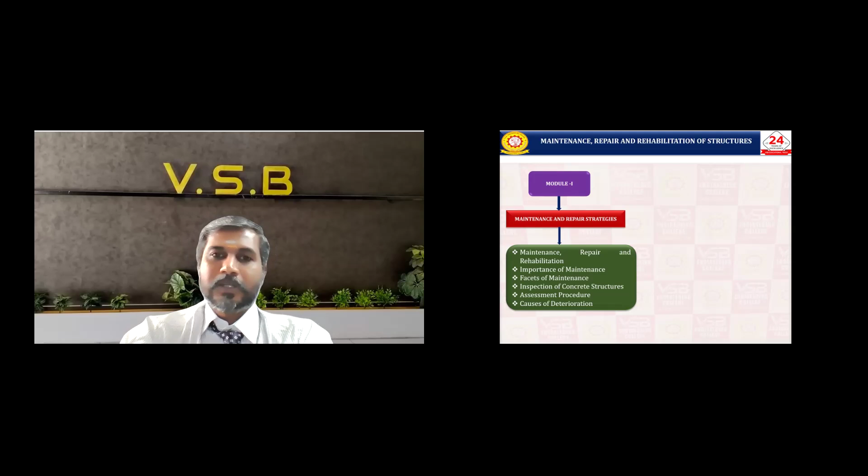A quick recap of module 1: we discussed maintenance and repair strategies, the basic fundamental definitions of maintenance, repair and rehabilitation of structures, the importance of maintenance, facets of maintenance, and inspection of various concrete structures, along with various assessment procedures to assess existing concrete surfaces and the causes of deterioration of structures and how to prevent such deterioration. Everything was discussed in module 1.

Now we are going to discuss module 2, serviceability and durability of concrete. Here we will elaborately discuss the quality assurance of concrete, which we can maintain before concreting, during concreting, and after concreting. So three stages are important to maintain the quality of concrete.

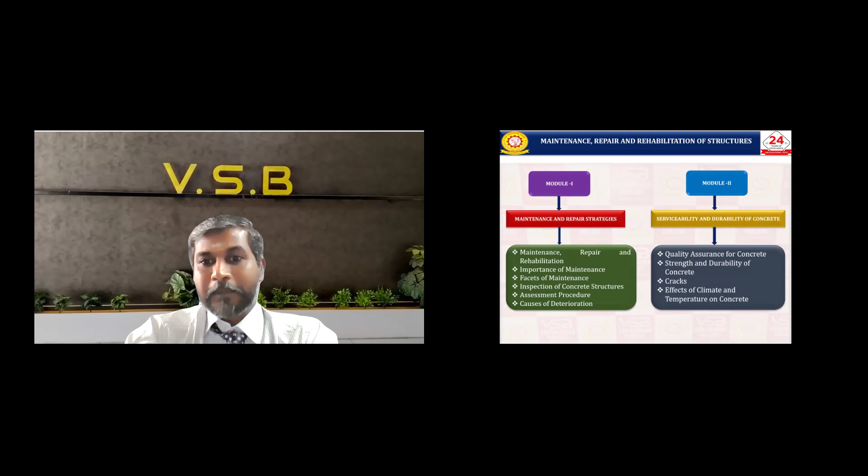After that, we will discuss the strength and durability of concrete, how cracks form, and how we can repair various types of cracks. Finally, we will discuss the effect of climate and temperature on concrete, which we will cover in detail in module 2.

What is our module 2 objective? The first prime objective is for learners to understand the serviceability and durability of concrete structures. Serviceability indicates comfort of people, safety of people, and proper functioning of concrete structures. Durability indicates long life of the structure and resistance to damage.

So how do we preserve serviceability and durability? We need to maintain proper maintenance, meaning no excess cracks, deflection, or water leakages. While talking about durability, we can achieve resistance to weather, moisture, and chemicals. These come under objective 1 of module 2.

Objective 2 of module 2: learners should apply quality practices to achieve concrete strength and durability. How do we achieve the quality of concrete? We need to maintain three stages: pre-construction stages, during construction stages, and post-construction stages.

We need proper standard procedures to achieve quality assurance. For example, we need to maintain proper quality of mix design, and select high quality materials. Here material indicates that for making concrete, cement is one of the prime binding materials, along with fine aggregate and coarse aggregate.

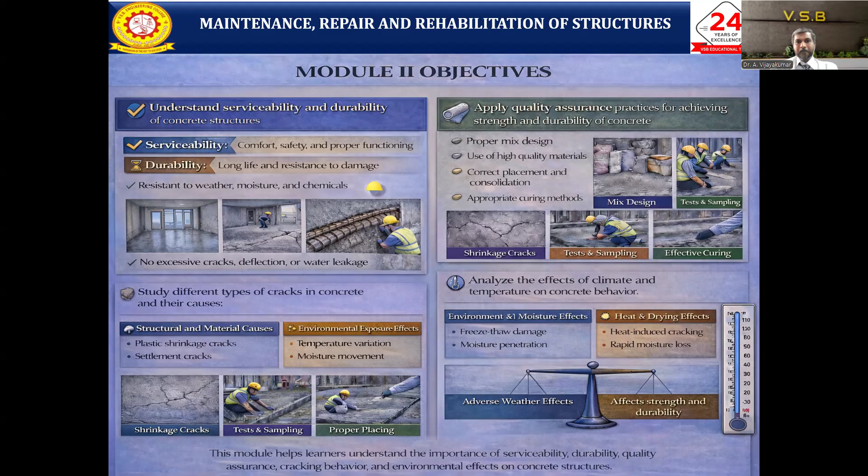So the first topic is quality assurance of concrete. Quality assurance is achieved through a systematic process. What is this systematic process? To achieve the quality of concrete, we need to maintain pre-concreting, during concreting, and post-concreting. These three systematic processes we need to maintain from the starting onwards.

Selection of material - that's why we discussed earlier in objectives that we need to select good quality materials, and workmanship - the people who are working at the concrete stages - and the construction must meet the required standards. So this quality assurance involves various testing.

Testing means what? When you make concrete, we use different types of materials - fine aggregate, coarse aggregate, and cement. Everything needs to be tested properly. Some examples shown in the picture: the slump cone test is very important for concrete, and cube testing is also important for the concrete section.

Then various inspections during the concrete process, and monitoring during production, mixing, placement, and curing. These are involved during the concrete processes to maintain the quality assurance of concrete.

So when looking at the sequence, what is it? We need to do proper material inspection - coarse aggregate, fine aggregate, cement. Sometimes we mix in admixtures also, which also needs proper inspection.

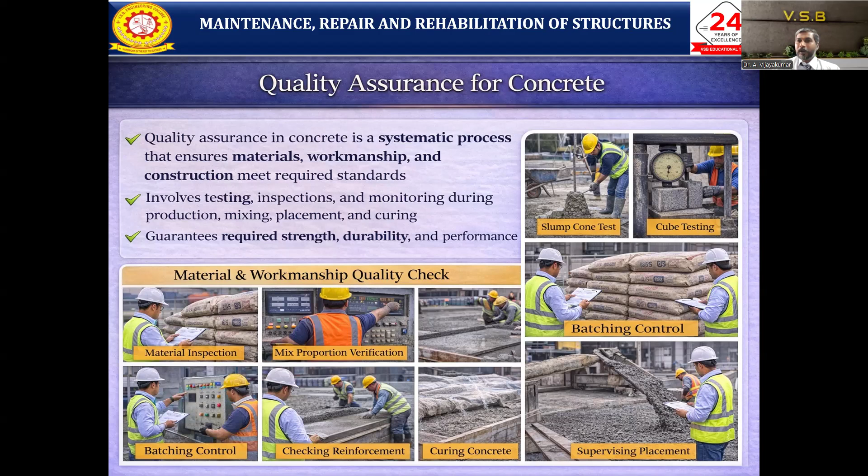What is our final aim, our ultimate aim? We need to monitor, we need a systematic process to follow to achieve the quality assurance of the concrete structure. Once you maintain pre-concreting, during concreting and post-concreting, we will get the guaranteed required strength - what we are aiming for, what we are dreaming of. The durability and performance, everything we can achieve once we maintain proper quality assurance of our concrete surfaces.

So this is the sequence of methods we follow for quality assurance of concrete. What are the three stages? One is pre-construction stages, second is during-construction stages, and third is post-construction stages.

First, the pre-construction stage to ensure high quality of the material and proper mix design, which we need to follow to maintain the quality assurance of the concrete. When selecting material, whether aggregate, fine aggregate, coarse aggregate, admixtures or cement, quality should not be compromised as a civil engineer. We need to select proper high quality material for our concrete.

Whatever the mix design, when doing trial mixes, we need to follow the correct methodology, whether it's M30, M40, or M45 concrete.

Before starting, we need to test all the materials. Aggregate testing will be there: flakiness test, impact testing, abrasion test, elongation test. These aggregate tests will be sieve analysis. All these tests we need to calculate. Then for cement, we need initial setting and final setting, fineness, modulus and soundness - everything we need to test before proceeding.

Whatever mix design comes, we need to follow trial mix assessment based on workability and strength. So we need to monitor proper water cement ratio control, mix proportioning and adjustment, and lab testing analysis for the trial mixes decided for the site - everything we need to achieve in the lab results. Before going to concrete, we need to assess and give assurance, get the standard value. That is what we need to maintain to achieve quality assurance before concreting itself.

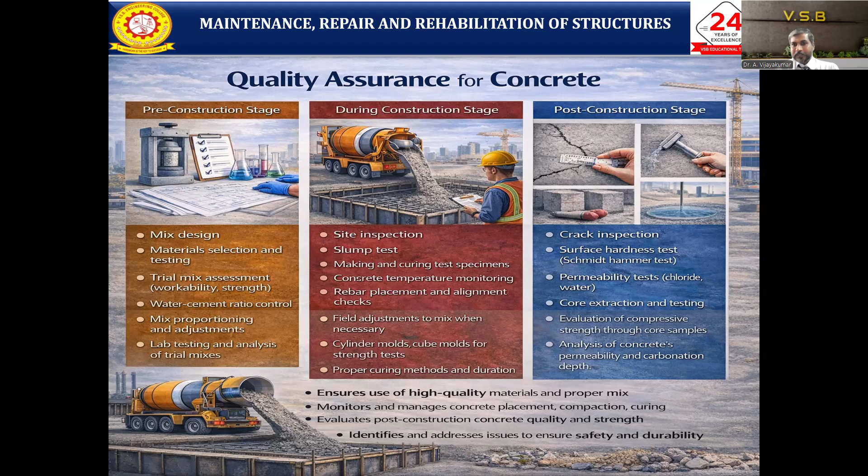So this topic is important for our concrete structures. Next topic: strength and durability of concrete.

What is the indication for strength of concrete? Our concrete member, our building member - the main prime aim is to resist forces, whether dead load, live load, or lateral load, whatever load it is. Our concrete structure must resist without breaking and without deforming - that is called strength.

So the main strength of concrete focuses on its ability to withstand loads and stresses. We find out the strength of concrete based on the compressive test, tensile strength, and flexural strength.

These are the key tests available to check the strength of concrete. These three tests have different influencing factors. One is the water cement ratio - when water added increases, strength automatically reduces, and vice versa.

Then curing time - if you have good curing, you get more strength and durability increases. If not properly cured, strength will be reduced and durability also decreases. Then admixtures - these are a few factors influencing the strength of concrete.

Coming to durability - as a building or structure, concrete will resist deterioration against so many forces or causes. Our building should not deteriorate and should maintain desired properties over time. When you start construction, you have desired properties of concrete that you need to maintain over the whole lifespan of the structure - that is durability.

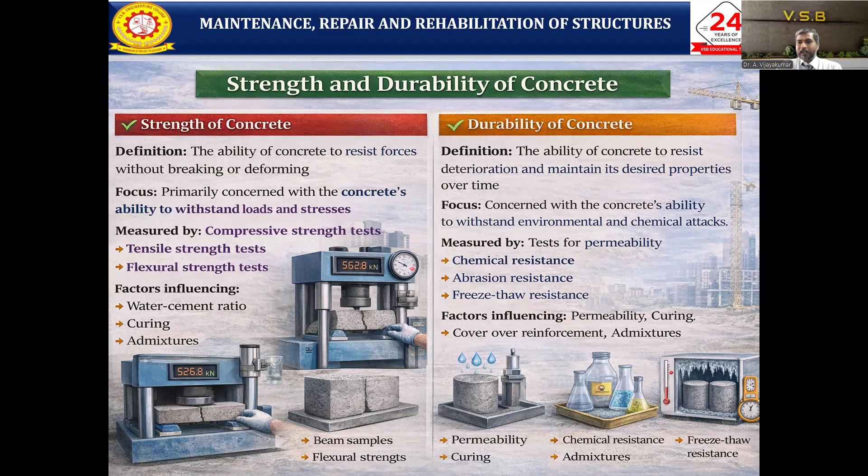So these are the pictures. We can do permeability tests, chemical tests, and freezing-thawing resistance tests - everything to measure the durability of concrete.

So first we are going to discover the key points of the strength properties. Strength is achieved through three methods: one is the compression testing method, and another is tensile strength.

Normally concrete is very good in compression but very weak in tension. Directly we cannot measure the tension, that's why we do the split cylinder test. Direct tension is quite difficult, that's why we make a cylinder and use the UTM to conduct a split cylinder test.

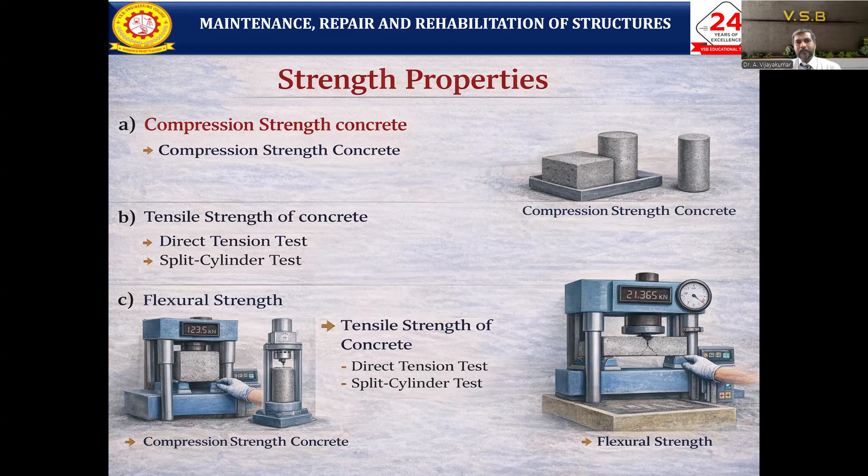And finally, flexural strength. So these are the three methods available to assess the strength of concrete structures.

When selecting the specimen, we need to make the desired trial mix, maybe M15, M50, or M20 concrete, whatever the concrete may be. For the selection of the concrete, we pour it in three layers.

Each layer we need to compact using the tamping rod, minimum 35 strokes, done properly. Then only we can reduce the voids and honeycombing formation. So we need to do proper compaction.

Once the concrete is poured, the next day we need to remove the mold, then keep it in the water tank for curing as test specimens.

Once poured in the water, we need to cure for a minimum of 7, 14, or 28 days. Once it's over 7, 14, or 28 days, we take it from the curing tank and keep it at normal room temperature, just outside, so the atmosphere moisture will spread out.

After that, we place it in the UTM, the universal testing machine, or compression testing machine. We start applying the load gradually until a crack occurs. We place the cube or cylinder in the compression testing machine.

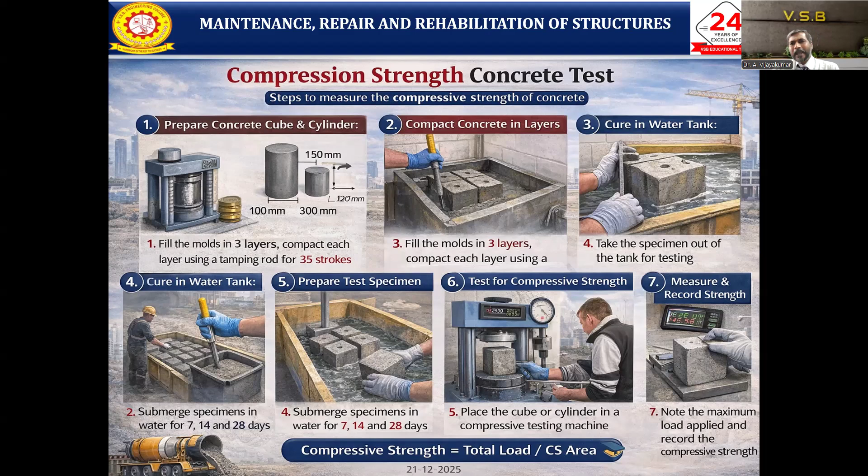Otherwise, if I'm making a trial mix of M30 or M40 concrete, we need to follow the same standard procedure and conduct the test. Our value should not be less than 30 Newton per mm square or 40 Newton per mm square. Then only we can achieve the proper composition. This is one of the prime methods to assess the strength of concrete using cubes and cylinders.

Next, coming to the split tensile test. Earlier we mentioned that concrete is very good in compression and very weak in tension. There's no need to measure tension normally, but concrete will take a little bit of tension.

So we have two methods to find out the tension: one is the direct method and the other is the indirect method. The direct method is not possible, it's quite uncomfortable and difficult to measure tensile stress. So we follow one more method, the split cylindrical test.

For this, we need to select a proper standard size cylinder, minimum 50 mm diameter, same as followed in compression testing. We need to pour the concrete in layers, give 35 strokes with the tamping rod, compact it properly, then cure it properly.

They need to remove the mold and keep it in the tank. Same like that, we need 7 or 14 or 28 days of curing. After that, we need to take the mold out from the specimen and keep it in the room atmosphere. Then we need to keep the test specimen in our compression testing machine.

Testing is in the horizontal layer. Then we need to gradually apply load. The test should focus on splitting the cylinder into two halves. Then only we can achieve our proper indirect split tensile tension, so we determine the tensile strength of the concrete.

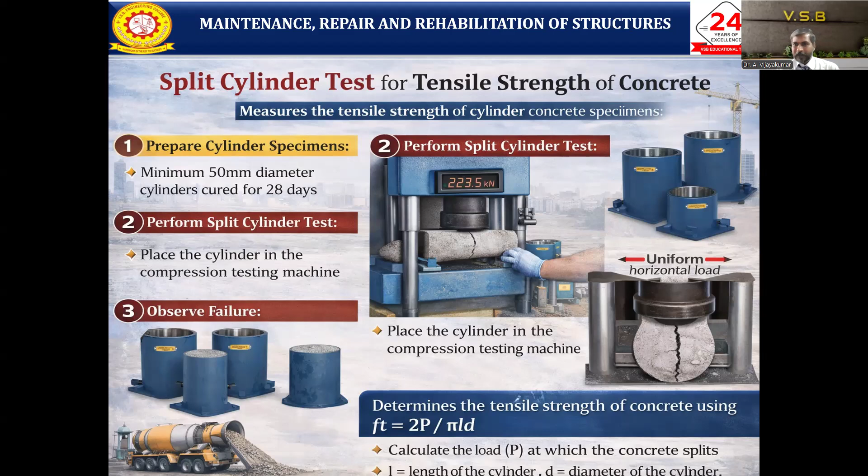There is the formula 2P divided by pi into L into D. P equals the force we applied, L equals length of the cylinder, and D equals diameter. So using this formula, we can find out the split tensile strength of the given concrete. So the third test is flexural.

It's like a beam. Beam is a flexural member, testing concrete strength. As usual, we need to select for the flexural test specimen a size of 150 by 150 mm by 700 mm, having different specimens. Following this test procedure, we need to make the concrete.

We need to compact properly using three layers. We need to cure mainly for 28 days, normally we need to keep it. After that, we need to keep it in the compression testing machine.

The testing method changes, the support condition changes, that means a 2-point loading. We place the beam in the machine under symmetrical 2-point loading. Then we need to apply the load gradually and properly.

Then we need to observe where the cracks form. The cracks form from the bottom - that is a flexural crack. Since it is simply supported, when you apply the load, definitely the crack will occur at the bottom, a flexural crack. Then it will subsequently fail at the top also, in a nearly vertical manner.

The crack will come. So using the modulus of rupture, M by Z, where Z is the section modulus and M is the moment, we can find FR. So calculate the load at which concrete breaks and cracks form - this is called the flexural concrete strength.

So using these three methods, we can assess the strength of the concrete: one is compression test, tensile test, and flexural concrete test. Using these three tests on a given concrete, we can assess its strength. This is called the destructive technique.

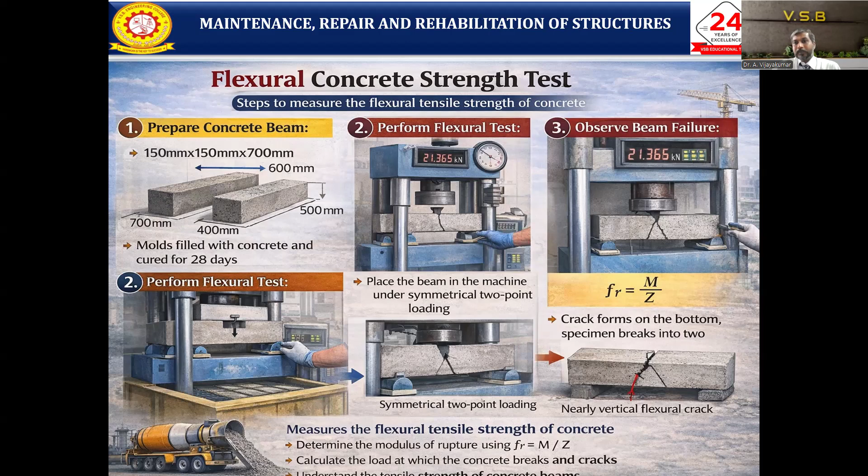So one more method is available: non-destructive. We should not break the materials. This NDT we are going to discuss later - how we determine the strength of the concrete without deterioration, without breaking the concrete structure.

Coming to the durability of the concrete, what is the pure definition? Our member structure is the concrete's ability to resist deterioration and maintain the desired properties over time. What I initially assumed as the properties, we need to maintain over the period of the lifespan of the structure.

That means ability to withstand the environment - our concrete structure should withstand all environmental conditions and chemical attacks. That is mainly the focus on durability.

How to measure the durability? Based on the permeability test, based on chemical resistance, based on the abrasion test, based on the freezing and thawing test - these are the tests available to measure the durability of concrete surfaces.

So here also many factors influence our durability. Permeability - of course, more permeable means durability will decrease. Curing time also - if not properly cured, durability also decreases. Cover of reinforcement - if not provided properly for the reinforcement, durability decreases. If not used properly, admixtures for the requirement process also cause durability to decrease. So these are some factors influencing the durability of concrete structures.

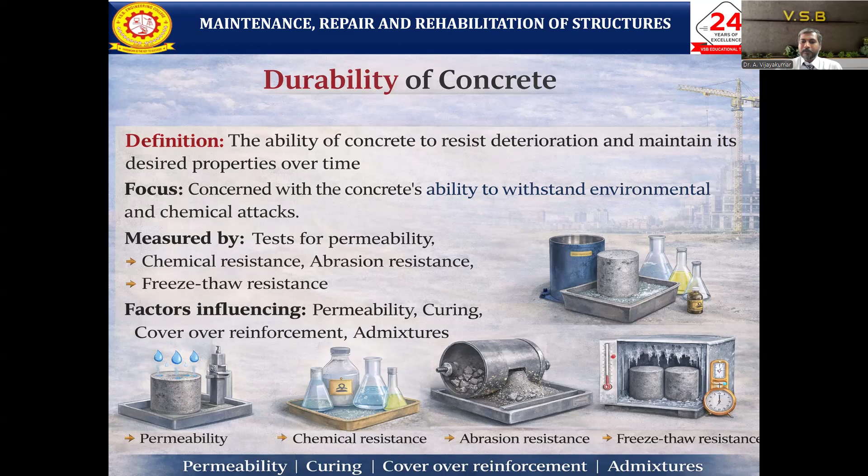The first important test is called the permeability test. Permeability is the ability of the concrete to allow water or gases to pass through it. So as a civil engineer, our ultimate aim is that our concrete member should not allow permeability. That is important. Somehow, what will happen - it will be permeable.

Automatically, water or gases pass into the concrete member, and that directly affects the durability of the concrete. Water starts to penetrate inside the concrete surfaces, and there may definitely be chances of corrosion of the rebar. High permeability means lower durability, less permeability means higher durability - it's vice versa. So corrosion of the reinforcement is caused by water and chemicals entering the concrete.

Our ultimate goal is to prevent water penetration into the concrete surfaces. When moisture, water, or gases penetrate the concrete surface, it automatically touches the rebar, which causes corrosion. Some structures are called lifeline structures - dams, nuclear power plants. For these structures we should not compromise the quality of concrete; they should not be permeable, they should be impermeable, and we should not allow even small hairline cracks.

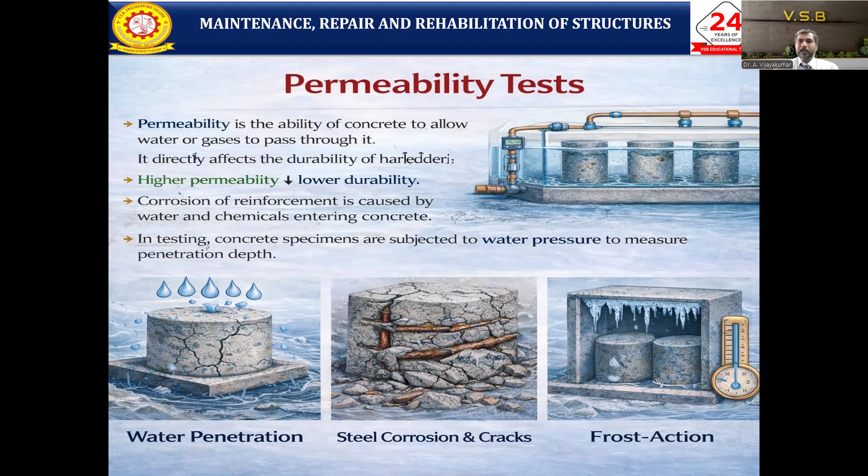In other cases, in a cold climate - minus 20 degrees or 10 degrees Celsius - if there's a gap and water has penetrated, it will freeze. Continuous freezing and thawing, continuous freezing and thawing, also creates chances of failure in concrete. So this is one of the prime methods to assess the durability of concrete, using the permeability test.

So through the cracks, water starts to penetrate inside. After some time, the reinforcement below - in the beam too - everything starts to get rusted. Over a period of time, severe deterioration happens to the entire concrete surface, and once severe deterioration occurs, it's very difficult to repair. So our ultimate aim, when we see permeability issues, is to arrest it immediately - this is very important for the permeability of our concrete structures.

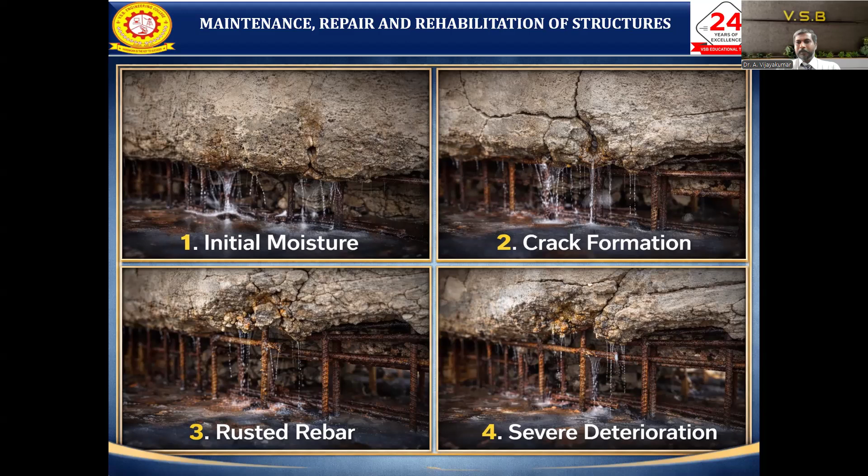So the next one is the freezing and thawing test. This is only applicable where temperatures reach minus 10 or 15 degrees Celsius. Freezing and thawing resistance evaluates the material's durability against repeating freeze-thaw cycles commonly experienced in cold climates.

Just imagine it's the month of December, and the climate has turned cold. During the evening or midnight, the winter sets in more, with mist appearing. The nature of water also changes - during the daytime water behaves differently, and during the nighttime water is a bit different.

Just imagine below 10 or 20 degrees Celsius, what will happen? It will be freezing and thawing continuously. This is more applicable for cold climates. Imagine our concrete member has small cracks. Through those cracks, water starts to penetrate inside. Sometimes in cold climate, it will freeze.

The water that enters into the crack will freeze. Once the climate changes, this frozen water starts thawing. The cycle repeats more than 300 or 400 times, freezing and thawing continuously. So the cracks also start to widen. That is called the tensile crack, which occurs in our concrete members.

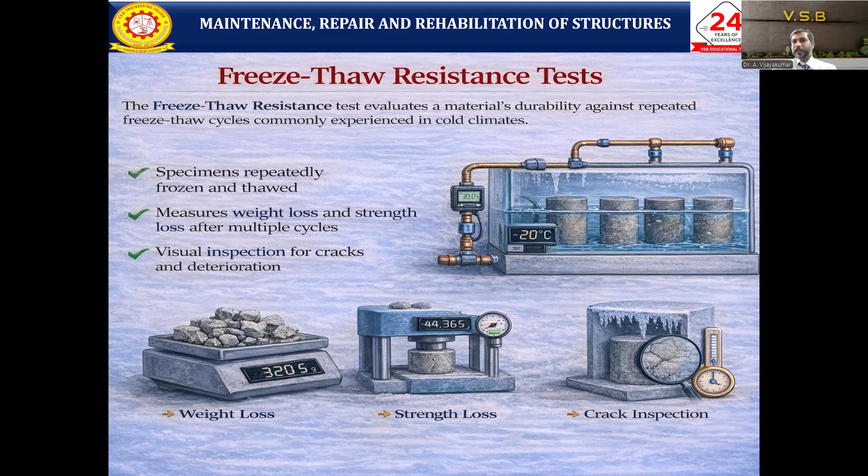This is a practical example: when you see concrete surfaces, for some reason the concrete starts to develop a crack. Through the crack, water starts to penetrate into the pores. Once the water penetrates, it starts freezing because the climate is cold. Then as the climate warms, thawing happens. This continuously occurs, and when freezing and thawing keep happening continuously, what happens?

Expansion keeps increasing. Internal tension is created in the concrete members, causing internal tension cracks. The surface also develops tension micro-cracking. This micro-cracking has chances to widen, and through this widening, water again starts to get into the micro-cracks, causing the cracking to increase further.

Once micro-cracking is produced and water penetrates, capillary swelling happens - the pore pressure allows water to penetrate all the places and settle. This is a continuous effect of freezing and thawing, with minus 20 degrees Celsius for freezing and plus 5 degrees Celsius for thawing. Continuous freezing and expansion cycles definitely cause deterioration of the surface.

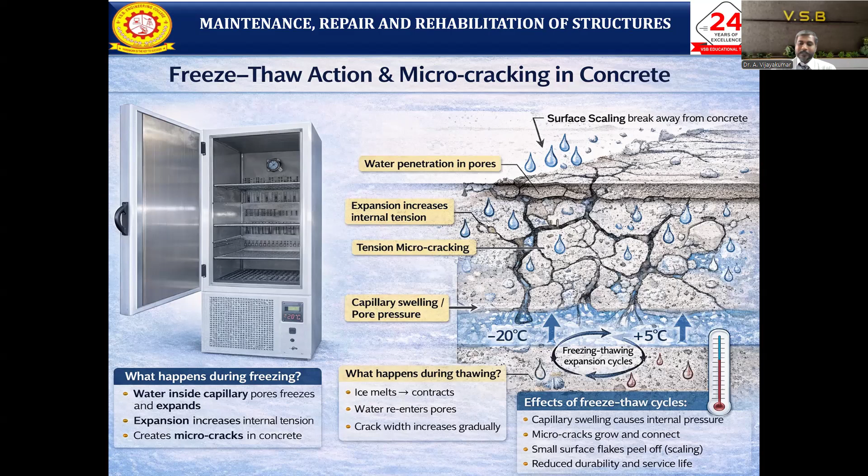Then it is very important for the alkali resistance test. Normally we evaluate the resistance of the concrete or mortar in a high pH, alkaline environment, meaning greater than pH 7, for high alkaline value. So how do we conduct the test for alkalinity? The concrete specimen is immersed in an alkaline solution with pH value greater than 7.

We need to keep it for more days immersed in the alkaline solution. What happens is it starts to penetrate inside the concrete surfaces, and a chemical reaction starts. Sometimes it goes to all the places, starting weight losses, and it goes into the bond and everything inside the material.

So weight loss will happen and strength loss will happen. Surface damage, cracks also will be there. So we need to analyze the internal changes in the concrete - it will be a chemical effect.

So where we apply this - near an industry area, if you construct a building, there may be chances of cracks. The alkaline solution or alkaline matter may get chances to penetrate into the concrete surface. That also starts the deterioration of the concrete surfaces, which also reduces the durability of our concrete surface. We need to measure the alkaline reaction for that.

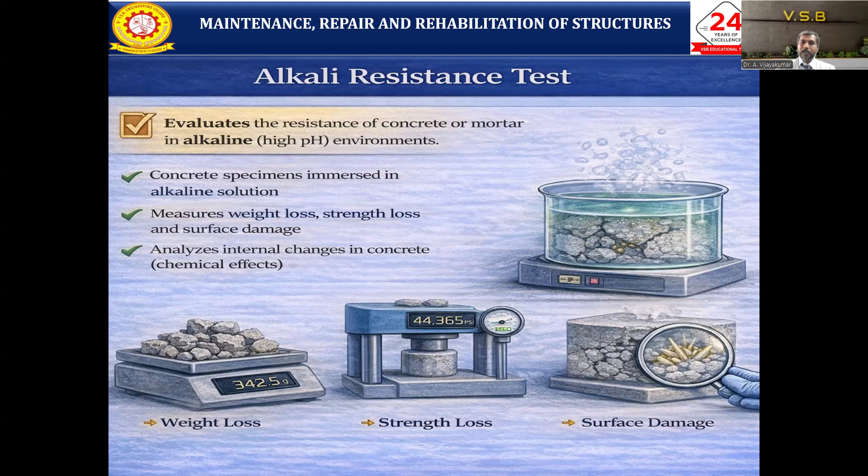Based on that, we can conclude and select the proper mixtures to use for our concrete structure to resist alkaline attack on the members. So this is a laboratory test to conduct for alkaline resistance - how does the alkaline behavior affect our concrete structure?

We have two chemical components available in the concrete surface: one is silica, the reactive silica in the aggregate, and the cement paste has alkali. So here we have two chemical components - the aggregate having silica and the cement paste having alkali - both available in the concrete surface.

If we have any micro cracking or cracking, moisture starts to penetrate and immediately chemical reactions begin. Because of this chemical reaction, the aggregate surrounding has chances of further expansive gel formation around the aggregate. With continuous water absorption, the gel thickness surrounding the aggregate starts increasing like a bulb, swelling with pressure, and then tensile cracks occur.

Internally, the expansion creates internal stresses, causing cracking in the aggregate and the surrounding concrete surfaces - the tensile crack occurs around it. Because of this, the micro cracks connect and map cracking occurs throughout the structure, so there are definitely chances of deterioration over a period of time.

So see, our building structure is an example of this. It's nearly constructed near a chemical industry, which has a pH value of more than 7 causing alkaline reaction. Because of that, maybe through water or through air, that chemical starts to penetrate into the concrete surfaces. So once it enters during moisture exposure, it starts the deterioration of the surfaces.

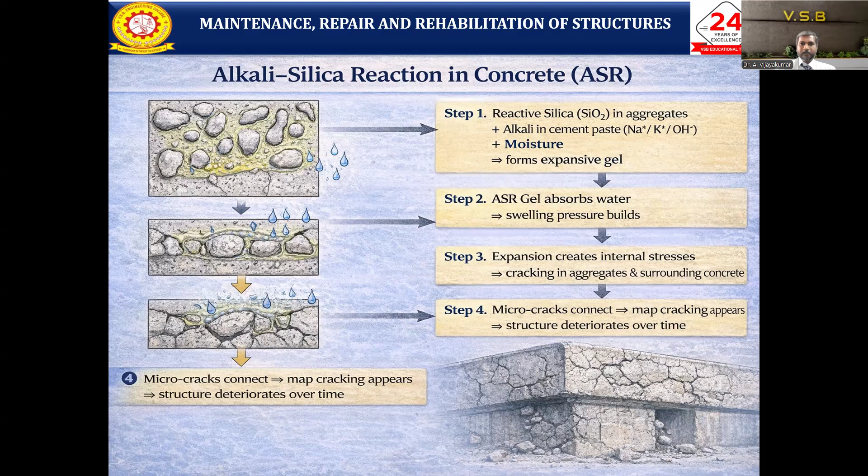Next test we are going to see is sulfate attack of the concrete, to evaluate the resistance of the concrete or mortar in a sulfate environment. The concrete specimen is immersed in a sulfate rich solution, and we check the weight losses, strength losses, and surface damages.

We use sulfate rich solution, SO4 and other chemicals for this test. Once immersed in this sulfate rich solution, there are chances of cracking, spalling and surface damage, everything is to be monitored properly.

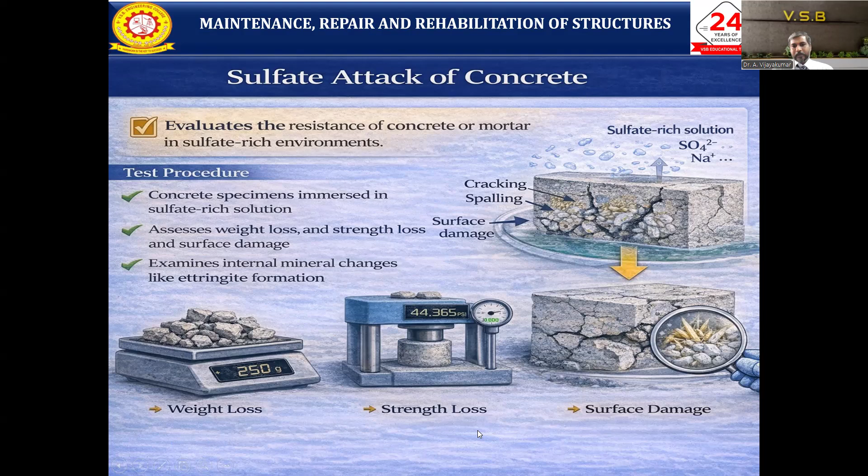What will happen once we use this solution is it will create ettringite formation. The internal mineralogical changes will happen. Once internal changes happen, that is called ettringite formation. Based on this, weight loss will be there, strength will be reduced, and surface will be damaged. This is the method for sulfate attack on concrete.

So how does it happen in real life? Sulfate attack occurs in real structures when sulfate ions react with components in the concrete, leading to expansion and damage. Sulfate is more available in the soil, and our groundwater also has more sulfate. This will mingle and contact with the concrete, then the chemical reaction will start.

So there is presence of sulfate in the soil or groundwater, and use of sulfate containing water and materials in the concrete. What happens once sulfate attack occurs in the concrete? Tensile cracks will occur, expansion and cracking will occur, surface scaling and disintegration of the concrete material will occur. So finally, strength will be reduced and durability of the concrete will also be reduced for the given concrete. This is the method for sulfate attacks.

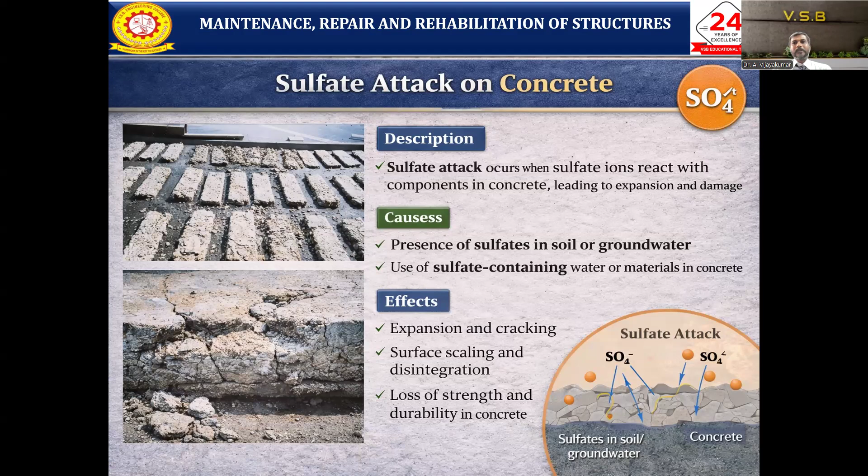So how does the reaction happen? We discussed where sulfate is available - one is groundwater, soil having groundwater. It will contact with the cement matrix. Once it contacts, ettringite will form - a new gel formation will be formed.

The sulfate attack is caused by reaction of the sulfate ions with calcium hydroxide in the concrete, forming ettringite - this new chemical reaction forms. Because of this, our concrete members start to expand and stress, cracks will be formed, micro cracks will be formed, this causes damage, and this is finally the deterioration of the concrete.

So whatever may be the things, our concrete members need to be maintained impermeable. These are the tests for the durability of the concrete.

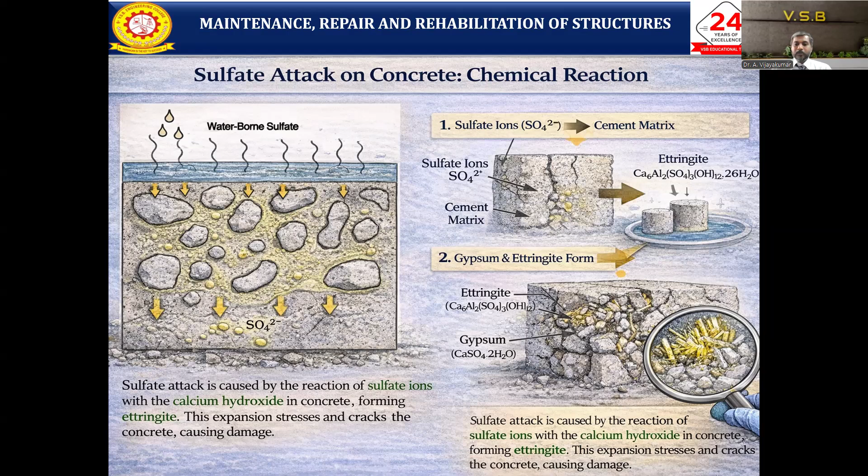So the next topic is cracks in concrete - the different types and causes of cracks. What is the definition of cracks? Cracks are a separation - they separate the structure into two parts. You can call it a fracture or a discontinuity, because earlier it was continuous, now it becomes discontinuous, and this appears in materials like concrete, masonry, or plaster.

The reasons are several - maybe physical reasons, environmental reasons, or structural factors. The main phenomenon of cracks is discontinuity of the structural member, a small separation or crack. Once a crack occurs in the concrete surface, it will definitely affect the durability of the concrete. Then the appearance and aesthetics will change in the concrete surfaces, and structural integrity will change. That is the main effect of cracks in concrete surfaces.

So what are the causes of cracks in concrete? We classify them into three types - one is structural crack and non-structural crack. That is classified into one type.

Structural cracks will be because of excess loading or overloading, which chances the structure will fail, and immediately foundation settlement or differential movement of settlement, maybe chances of chemical failure, and design flaws. Okay, not designed properly, construction changes, poor detailing, inadequate reinforcement, or seismic activities or the earthquake. These will become structural cracks.

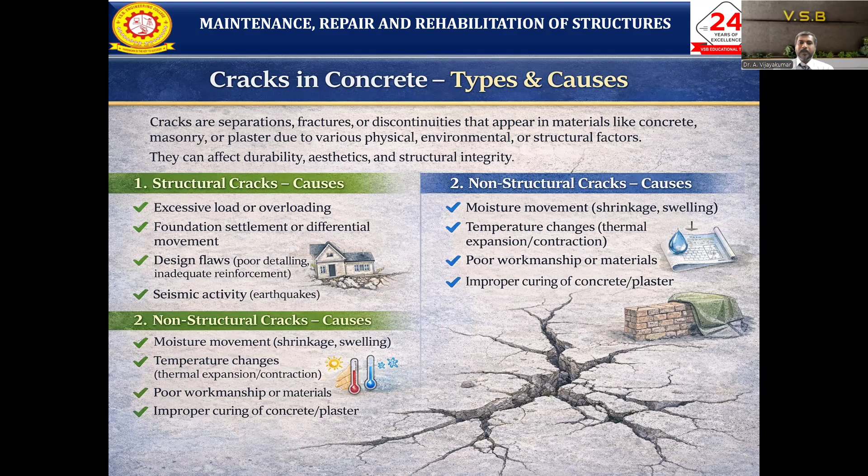Based on appearance also, we have divided different types of cracks. One is shrinkage cracks, which is divided into two: plastic shrinkage cracks and dry shrinkage cracks. Plastic shrinkage crack appears from rapid loss in the fresh concrete. Once pouring the concrete, immediately water starts to evaporate, and because of the water evaporation, crack will form. That type of crack is called plastic shrinkage crack.

So what is a dry shrinkage crack? It occurs when the concrete or mortar loses moisture and contracts over a period. It won't show immediate cracks; it takes a long time. So after hardening of the concrete, it will get some cracks - that is called dry shrinkage crack.

Because of foundation failure, the movement of soil or settlement of uneven loading, maybe chances of vertical crack or horizontal cracks in the wall or floors or roofs, whatever it may be - that is the settlement crack, mainly coming from foundation failure.

Thermal cracks caused by temperature variation leading to expansion and contraction of the material - thermal cracks will come. Currently, when reinforcement bar rusts, because somehow moisture can enter the concrete surfaces, maybe rust in the reinforcement. Because of rust, expansion will come, maybe chances of causing cracking.

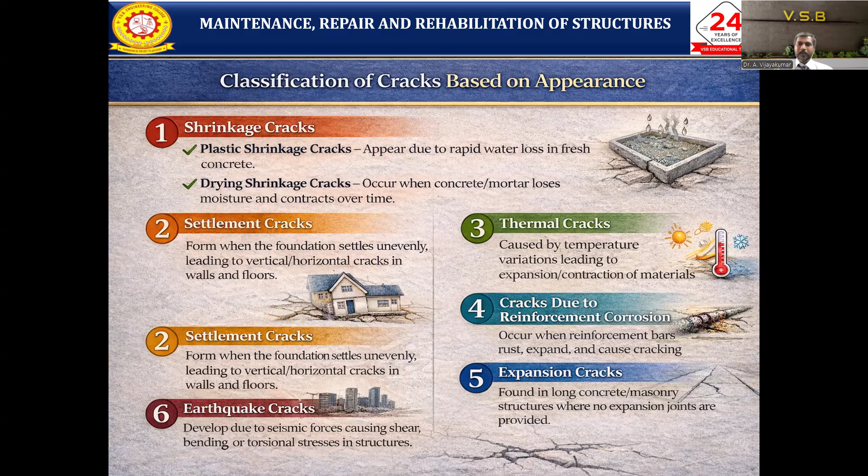What is the effect of climate and temperature on concrete? What is the cause or reason for this? Exposure to changing climate conditions, frequently changing causes happening with temperature - daily seasonal variation, daytime temperature and evening temperature, because of that the causes. Then cold and hot climate cycles will change. Then long duration elevated temperature because of structure exposure to industrial fire or industrial heat - our structure may sustain damage.

There are also chances of failure of concrete surfaces. The continuous freezing cycle in cold regions may cause chances. So what will happen in the concrete member? Definitely, for this reason, thermal expansion and contraction will happen, and for that also maybe failure will happen in the concrete structure.

So as temperature increases or decreases, shrinkage crack will occur. Then increasing permeability due to micro crack - essentially crack will form micro crack, then moisture will enter automatically, starting to increase crack, then increasing permeability too. Then accelerated corrosion of the reinforcement gives chances to reinforcement rebar corrosion, and then definitely losses will happen - bond between the steel and concrete in the concrete.

So how does it affect durability? It reduces the service life. Okay, when we assumed 50 years, it becomes 60 or 70 years, no - that automatically reduces. Okay, one thing is the concrete started to fail.

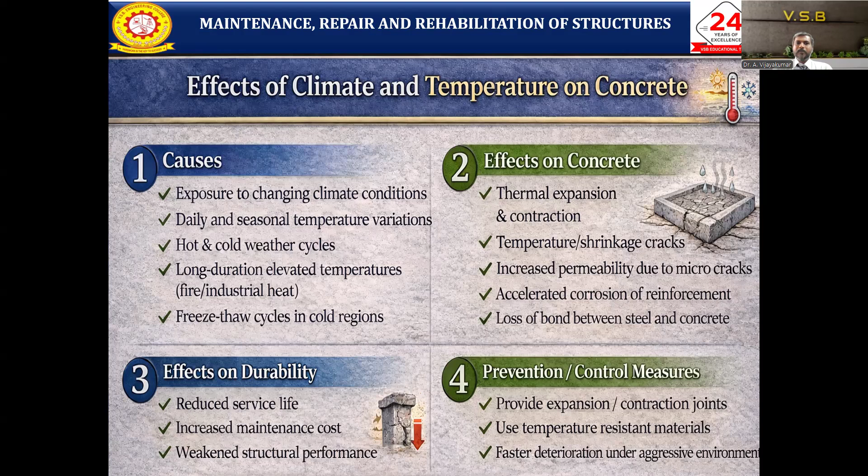To provide proper control, as per IS code, we need to provide proper expansion and contraction joints, and use temperature resistant materials. The field has different types of materials available to resist temperature; those we need to select and incorporate in our construction to avoid faster deterioration under aggressive environmental measures. These are the prevention control measures we can take to address climate and temperature effects on concrete.

Okay, so this is a mind map of what we have discussed in the last couple of slides - durability and serviceability of concrete.

First, we discussed quality assurance. To maintain quality assurance, we need to select proper materials, high quality materials. We discussed three stages: pre-construction stage, during construction stage, and post-construction stage - that means mix design, collection of material, proper mixing, proper curing, and proper testing. Based on that, we can achieve the quality assurance of concrete.

Then we discussed strength and durability of concrete. From the strength point of view, we discussed compressive strength, flexural strength, and split tensile strength. When talking about durability, we discussed abrasion resistance, chemical resistance, permeability, and chloride test - that's what we covered for durability testing.

Next, cracks in concrete - the two types of cracks: structural cracks and non-structural cracks, and cracks classified by appearance. Causes of cracking and prevention methods for cracking - that's what we discussed.

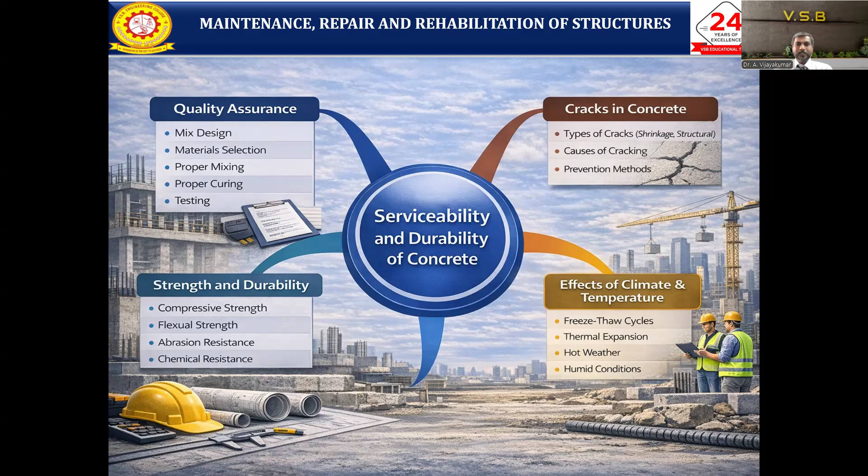Then effect of climate and temperature - we completed freezing and thawing cycles, how structure behavior is affected, thermal expansion, hot weather conditions, humid conditions, and how our concrete members behave. This serves as a milestone for understanding what module 2 discusses regarding serviceability and durability of concrete structures.

Hope learners, you can understand the concept of serviceability and durability of concrete structures based on what we discussed in classes. Hope learners understand quality assurance measures, achieving strength and durability of concrete, and understand different types of cracks in concrete and their causes, and how to remedy cracks. Learners can also understand the effect of climate and temperature on concrete and what will happen to the performance of the structure from a strength and durability point of view. Hope all learners can understand the lecture delivered for module 2.